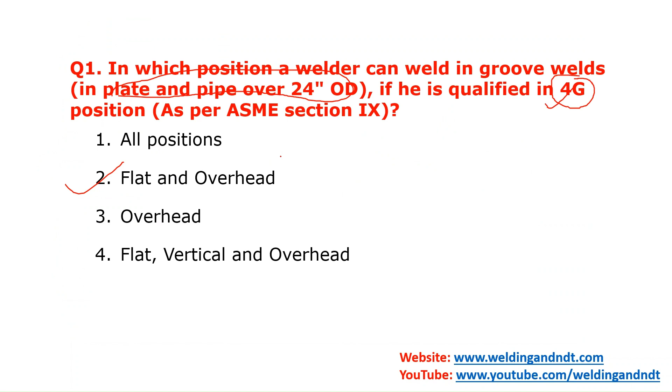Now we'll go to question number 2. A welder is qualified in 3F and 4F position. 3F and 4F positions are for fillet welding: 3F is vertical fillet weld and 4F is overhead fillet welding. So the welder is qualified in fillet welding, and the question is, in which of the following groove weld positions can he weld? If a welder is qualified in fillet position, he can weld only fillet welding. He will not be able to weld in any of the groove welding positions. Hence the answer is none of the above.

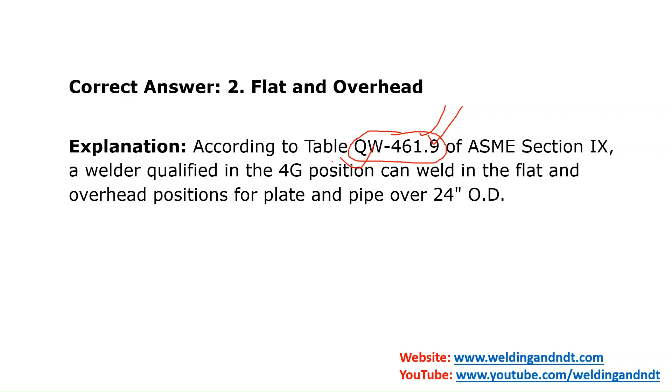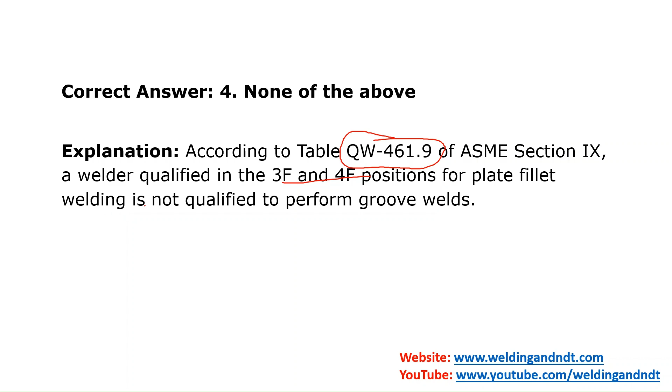Now question number 3: when a tensile test specimen breaks in the base metal outside of the weld or fusion line, the ultimate tensile strength, that is UTS, recorded may be at the most how much below the specified tensile strength to be accepted as per ASME Section 9?

So friends, if your tensile test specimen has broken outside the weld, then you can go up to 5% below the minimum specified tensile strength. Up to 5% below minimum tensile strength will be acceptable if the specimen has broken outside the welding zone.

Now question number 4: the acceptance criteria for radiography test of welder qualification test can be found in which of the following ASME codes? So for acceptance criteria of any welder qualification test, you will need to refer ASME Section 9. Please remember that in ASME Section 9, you will only find the acceptance criteria for welder qualification test, not for the job. For the job, you will have to refer the construction code.

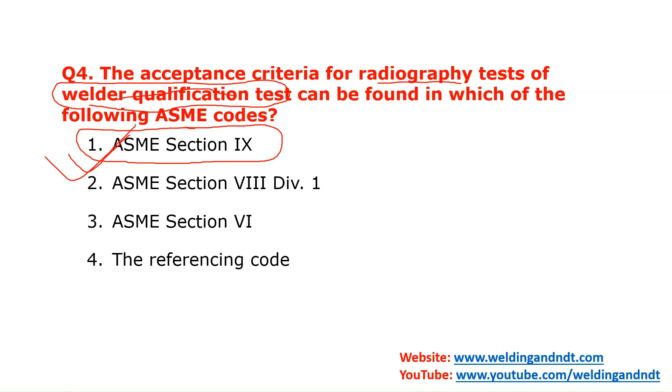Like if you are manufacturing a pressure vessel, then acceptance criteria for the pressure vessel will be found in ASME Section 8 Division 1. But for welder qualification test this is universal, irrespective of your construction code, you will have to refer ASME Section 9. So option 1 is the correct answer, and for the radiography test, it is given in QW 191.1.2.

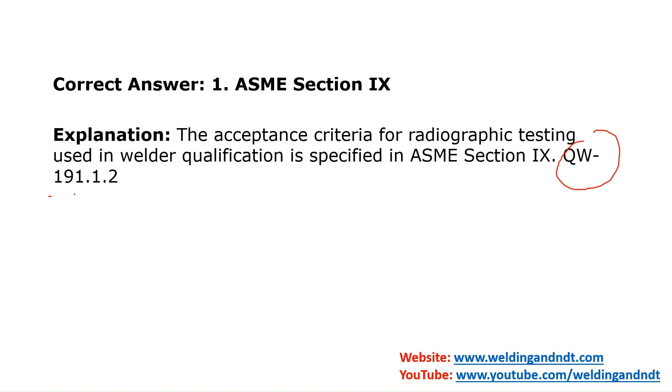Now, our question number 5. Question number 5 is asking: if a WPS was qualified under the 1965 edition of ASME Section 9, can it still be used today? Many inspectors are very confused. If you see a very old WPS, will it be applicable in 2024 or next year? This is a very confusing question for most of the inspectors.

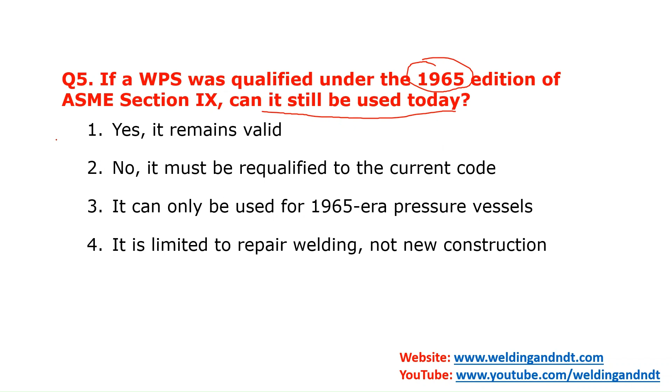So friends, any WPS which has been qualified to any previous ASME code will remain valid. So option 1 will be the correct answer. Yes, it remains valid. And why? For this, you need to go to ASME Section 9 QG 108. QG is general, and it applies to welding, brazing, and plastic fusing. So for all material joining processes, this remains valid as per QG 108 of ASME Section 9.

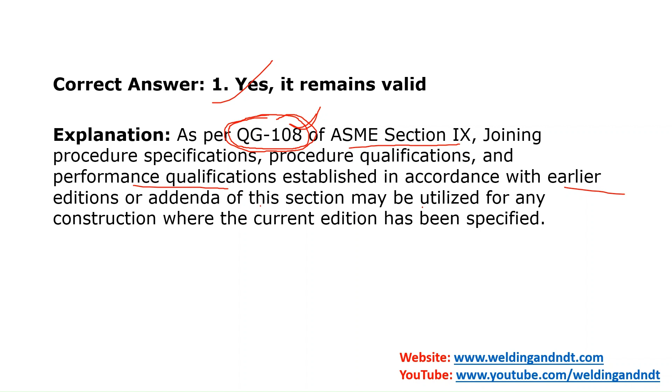Any performance qualification established in accordance with earlier editions of this section may be utilized for any construction code where the current edition has been specified. But you cannot go for a new procedure qualification test with a previous edition. Old qualified WPS can be used, but to qualify a new WPS you will have to refer the latest edition. If it has already been qualified, then you can use it forever.

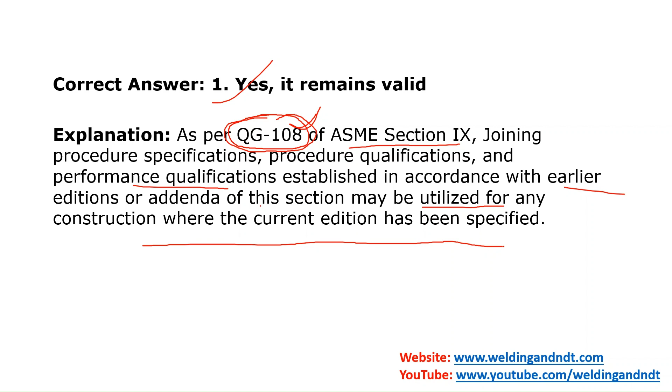So friends, our question number 6 is: if a welder was qualified in SMAW process, shielded metal arc welding, on January 1, 2023 and last performed welding with SMAW on March 30, 2023, will he still be qualified on October 15, 2024? Option 1 is yes, option 2 is no, option 3 is yes but with close monitoring, and option 4 is yes but only for non-critical jobs first.